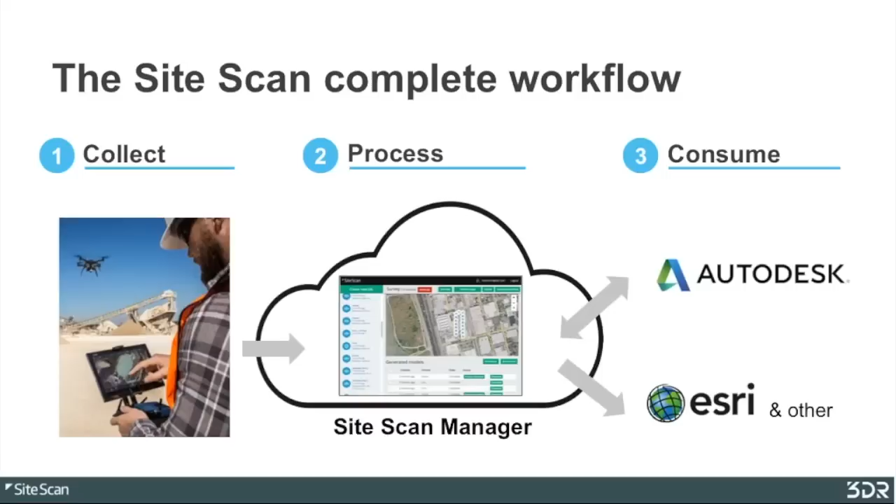So to conduct this, we used Site Scan with the R10C. The advantages we liked about Site Scan since we started working with it early on was the ease of use for collecting this information. It's a very simple product to use to design your flights on the fly and modify them as need be. The ability to upload that to the 3DR cloud for processing, and then finally being able to push that information into tools that we use commonly like Autodesk and Esri, or Esri's Drone2Map.

So we started using Site Scan with R10C back in March of this year. However, we've been working with unmanned systems for some time prior to that. We have had a 333 exemption since fairly early on. We were somewhere around 300 on the 333 exemption list. And our focus has always been on trying to make the same kind of products that our clients have always wanted. The end product doesn't change, just the means of collecting that information.

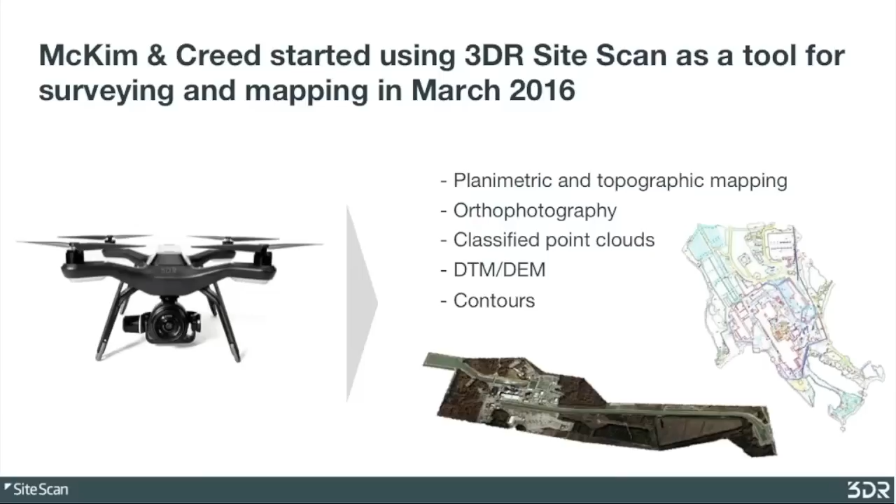So the clients are still going to want the same planimetric information that they've always wanted, held to the same specifications. Same for the orthophotography, the point clouds that are created through the dense image matching processes, and the surface models, the DTMs, DEMs, breaklines, and contours. So the products don't change. What changes is the way you collect the information. So you're still held to the same kind of standards. So that's always been our focus, and we felt that the best way to do that is to focus on smaller systems with big sensors to help us achieve the kind of accuracies that our clients expect.

So as I mentioned, there's 3 different project areas that we collected on this day. The first one being Wrightsville Beach. This is project 1. And in fact, in this image right here, you can see several of the areas that we collected. So we collected from this pier right here down to the end of the island, as well as the inlet jetty for Masonboro Island, which is to the south of that.

So the goal for the Wrightsville Beach project was to collect volumetric information for beach renourishment, and we wanted to assess the before and after condition of the beach for any type of storm event. We did this during Hurricane Awareness Week, which is kind of salient right now because we have a hurricane coming towards the United States. And it's important to be able to know the condition that the beach is in prior to a storm event like this so that reconstruction can take place correctly and you can assess the amount of damage that was done. So the idea is to collect topographical information about the beach before and after a storm event.

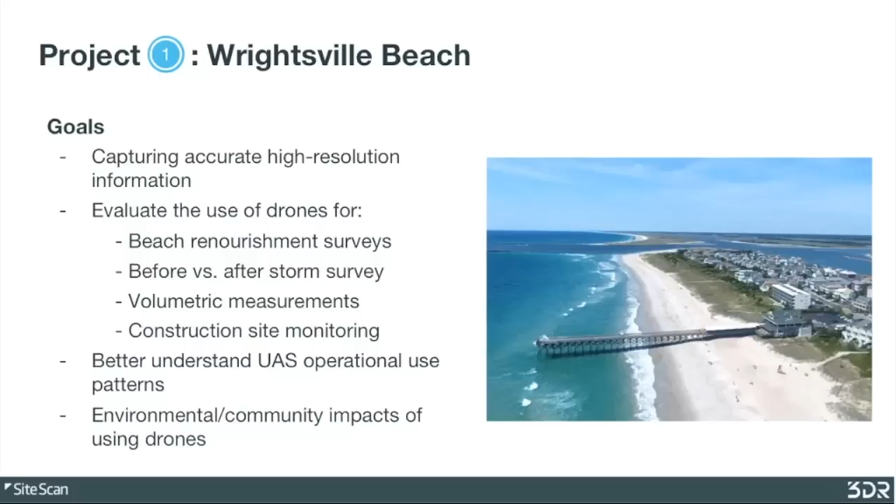So to do this, we laid down traditional ground control. We needed to be able to georeference this information as best we can and to assess it compared to traditional methods. So we laid down 14 control targets. We also collected 22 blind check shots. So it's 2 different types of survey, and this is pretty common with most types of remote sensing projects. You have your targets, your control, which is used to actually reference the information to the real world, and then you have your blind check shots, which are used to assess the quality of fit of the data.

So we conducted several flights with a few different systems. We did 2 flights with the Site Scan system with R10C up to the pier, and then another flight down on the south side. We also flew the Site Scan with the GoPro system at 400 feet AGL as well, because the camera system is a little different. The ground sampling distance obviously is about twice that of the R10C system. And then finally, we also flew it with a Phantom 4 at 200 feet. We flew it a little lower because we wanted to get a similar ground sampling distance to that of the R10C system. In order to do that, we had to fly it at half the altitude.

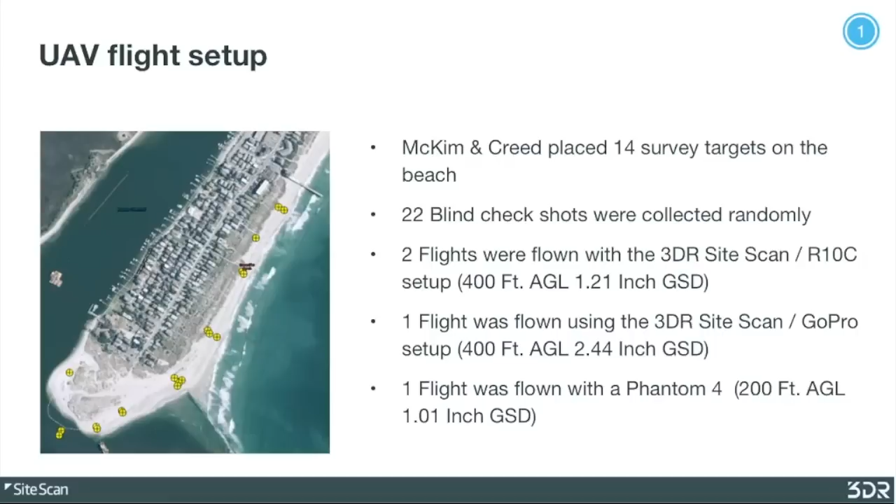So we processed that data. It took about 4.5 hours to produce our orthos, our digital surface models, our point clouds, and our 3D mesh. And then once measured, we were able to calculate our RMSE, which is our root mean square error, and we'll talk about that here in the next slide.

So how do we measure accuracy? So again, the idea is to treat this data similarly to how we would data from other systems. So using these processes, we create what some people call dense image matching, some people call it FODAR, structure from motion. It's all the same thing. It's point clouds created from the imagery. And so we wanted to assess the quality of that. And to do so, we treat that the same way we would a LiDAR point cloud.

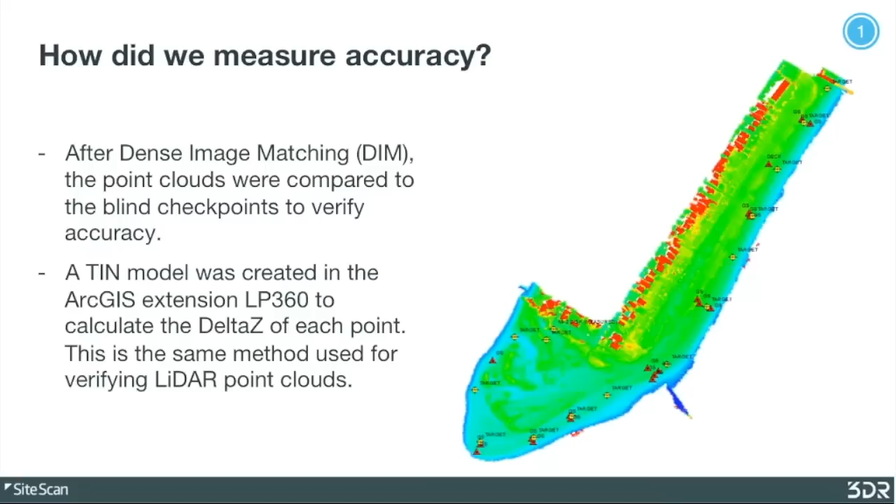So we bring that point cloud into software that would be used to evaluate that. And in this case, we used LP360, which is an extension of ArcGIS, to verify the quality of the TIN. And to do that, we bring in our blind checkpoints and we check the delta between the Z-value of those points versus the Z-value of the TIN directly above that point cloud. This is a very common process for assessing any type of point cloud information.

So the results, you can see we tested all 3 of those systems that we flew. And if you look at the very bottom, this is the vertical error tested against the point cloud. There's several different things we're looking at down here. You can see our error mean, our error range, our RMSE, and our 95th percentile, which is held to a higher standard.

So you can see first the Phantom 4, we had a pretty high RMSE. So it's 0.527 feet, which is pretty high for what we were looking for and the tools we were comparing against. And you can look at the error range on that. So some of those blind checkpoints were hitting anywhere between negative 0.8 feet and positive 1.4 feet. And then if you look at the NSSDA contour interval for that, you can see that the best we could conceivably do with this data is 2-foot contours.

Looking at the GoPro system, you can see that the RMSE is a lot lower. We've got 0.3. Again, a little higher than what we were looking for this type of project, but keep in mind that the ground sampling distance for that was twice that of the R10C system. And the outliers are much lower than that of the Phantom 4 that was flown. And then finally, the R10C system. You can see the RMSE is in the 0.13 range. Our error range is much lower. And the minimum contour interval is down to 0.4.

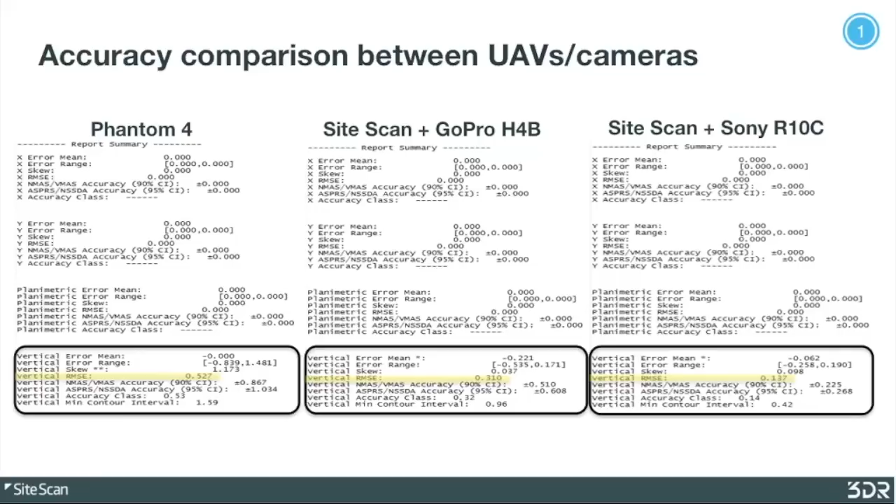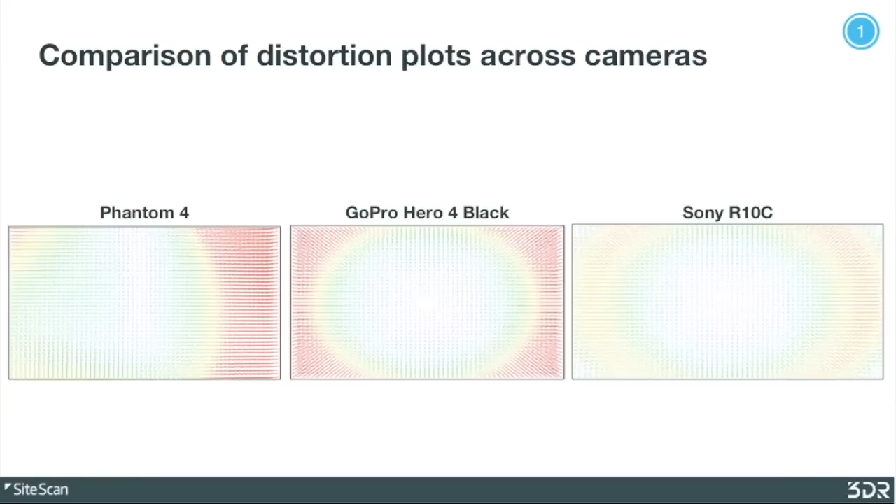So the next thing we were able to do, fortunately, when we flew Wrightsville Beach, at the same time, the Charleston Army Corps District was planning on doing their terrestrial LiDAR scans of the beach. This was something that they were planning on doing anyway as a pre-storm analysis of the area. So we were very lucky to be able to coordinate with them on this day to be able to collect this information at the same time.

They were able to use the same control points that we were using and the same blind checkpoints so we could compare the two data sets. And if you look, you can see that their RMSE was very, very similar to that from R10C. So they're right around 13 hundredths. If you look at the vertical error mean, their vertical error mean was also very similar to ours. However, it happened to be in the opposite direction of the error in the R10C system. So you got kind of the worst case scenario where one data set's a little bit above the control and one data set's a little bit below.

So to take that a little bit further, what we wanted to do was do a surface comparison of the two. So we created a bare earth surface of both point clouds. So we were just looking at the bare earth. And again, we wanted to do a delta of the two. So what you're looking at right here are the two overlapping data sets. Areas in green are where there was coincident data and the two data sets were within 3/10 of each other. And areas in purple are where they're either greater than 3/10 or there was not overlapping data.

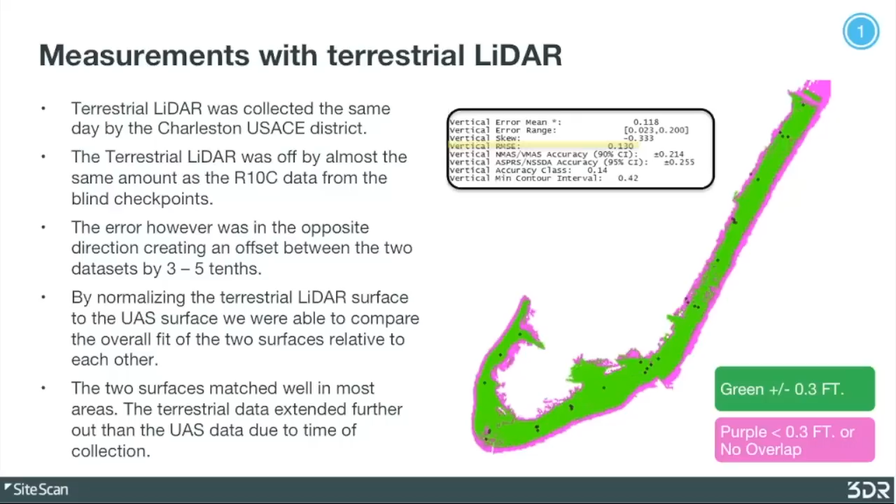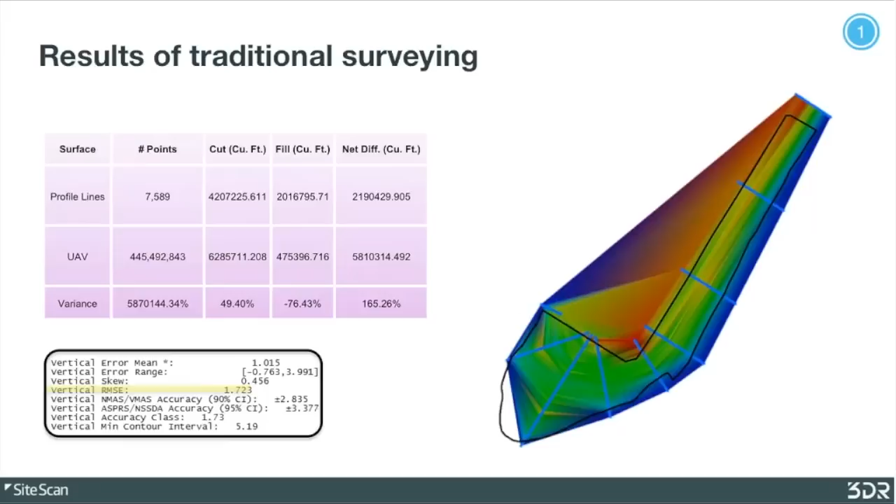So we ran our blind control points on that, which again is not a very fair assessment, but you can see our RMSE is very, very high. The minimum contour interval for this is 5 feet. And then we did some volume analysis of the black area just to determine the differences between it. And as you can see, it's quite significant between the unmanned system and the surface created from these profile lines. There's a huge amount of variance.

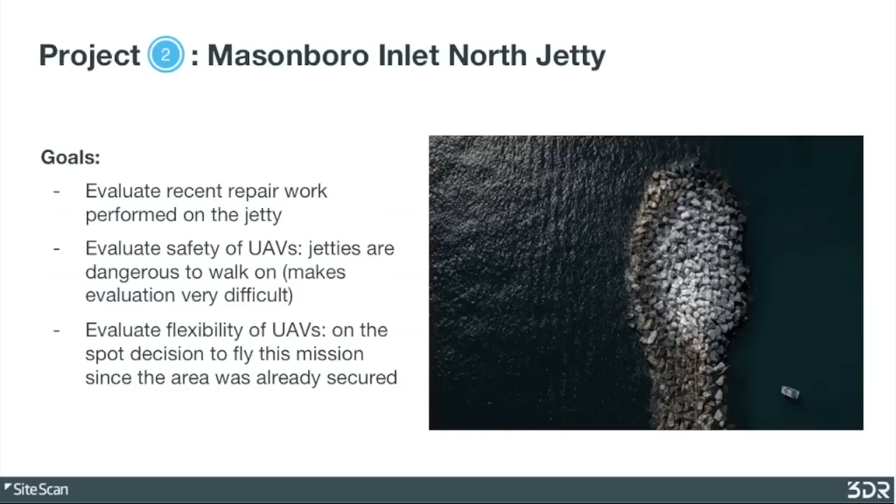So the next site was the North Masonboro Inlet jetty. This was the barrier island just south of Wrightsville Beach, and it's the northernmost inlet jetty. So when we originally set this project, although this area was controlled, we weren't necessarily planning on flying it. However, the Army Corps of Engineers that was there watching our flights as well was curious if we could fly this jetty. And the reason was because recently they had some work done on it, and they were just curious if they could look at that work.

And you can kind of see it in this GIF that's going by. There's some rocks that are pink, and then there's some that are gray. Those pink rocks were recently placed there on that site to kind of repair the jetty. So we went ahead and we flew this. And that's one of the nice things about unmanned systems: we have that flexibility to go ahead and plan this on the fly to collect this area.

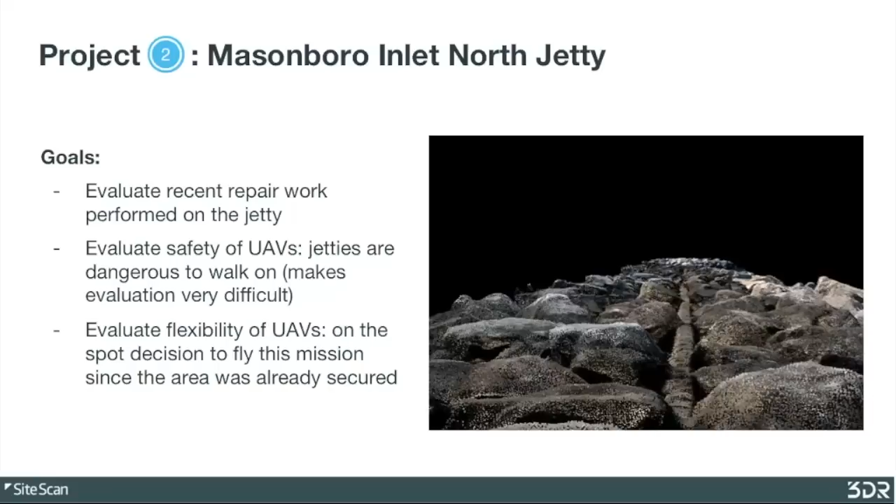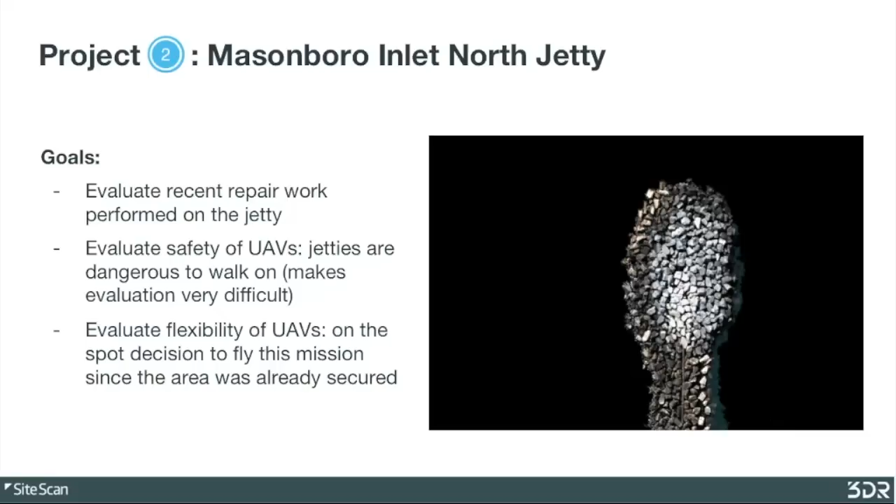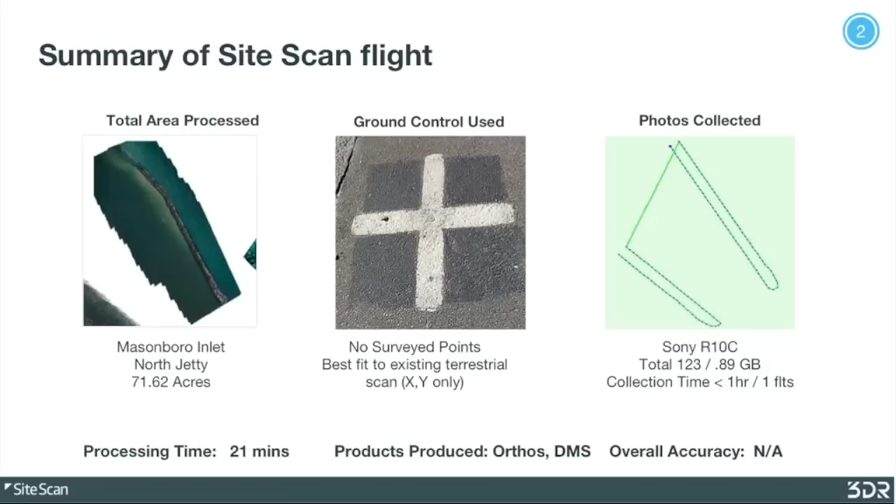Unfortunately, we did not have any ground control over this area because it was kind of an unplanned flight, and it's a fairly difficult area to collect some targets because it's just a very unsafe place to be walking on. So we covered about 71 acres for that. It took us about 21 minutes total time to process that. Again, we did not have any ground control. And we had 123 images that covered this area, similar ground sampling distance to what we collected before.

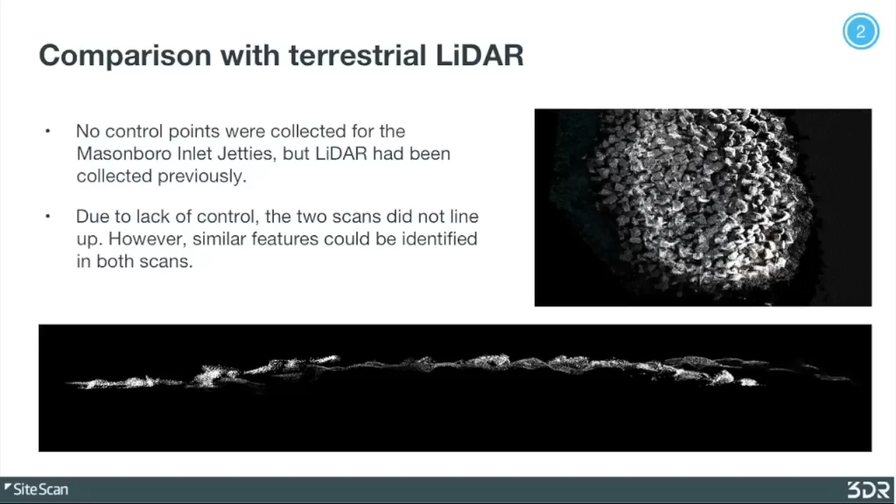One thing, however, that was pretty interesting about this particular project were the orthos. So we gave the orthos to the Army Corps of Engineers, and they were able to use them, even though they weren't spatially perfect, to assess the work from the subcontractor who had placed the new rocks on the jetty. And they realized that most of the work had been done the way it was contracted, but they did find areas where things were not 100% how they were supposed to be, and they were able to use that information to go back to the subcontractor and have them make the corrections necessary. And there wouldn't have been a practical way to do that otherwise. So it was kind of an unintended benefit of that particular project.

So again, kind of a cost comparison for this second site.

We didn't do a traditional survey cost analysis. Although it can be done, it is dangerous in a difficult area to collect. The terrestrial LiDAR system that they had collected with, we did a comparison of that. It was about 30% cheaper. And again, the aerial LiDAR, because the site is so small, was about 75% cheaper to do with the unmanned system.

So Kevin, I'll pass it back to you. Perfect. Great. Thank you, Christian.

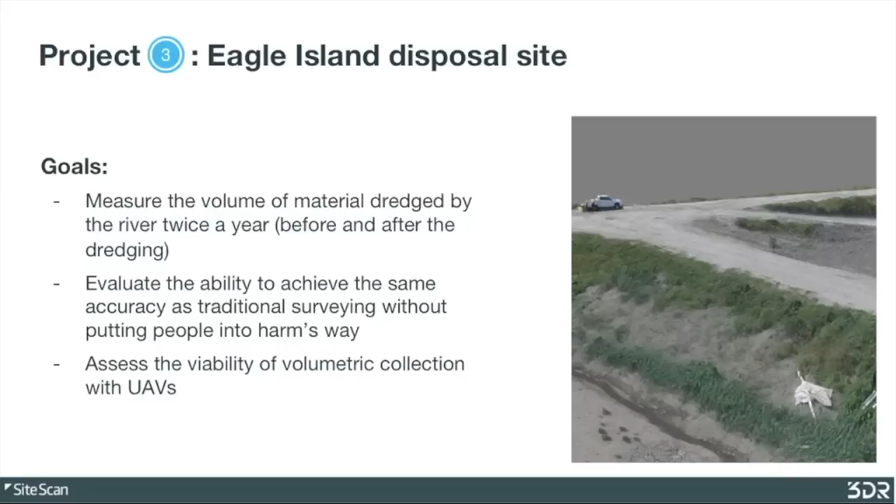In fact, when they do traditional survey, the way that we were told that they go about it is, when they're doing the profile lines across the pond itself, they take 4x8 sheets of plywood and they place them inside there to increase their footprint on the area, and they take their profile shots, and then they take another piece of plywood and they place it in front of it, and they hop onto that one, and they continue across the pond that way, which is not very safe. It's safer than just being on the pond itself, but you're still putting people in harm's way for some potential accidents.

So when we went to the site, what we did is we collected part of cell 1 and cell 2, and we did not want to put anyone inside of these areas where they were dangerous. So we collected ground control. We put 7 survey points around the area on the dikes themselves so that we didn't have to go inside of any of these containment areas.

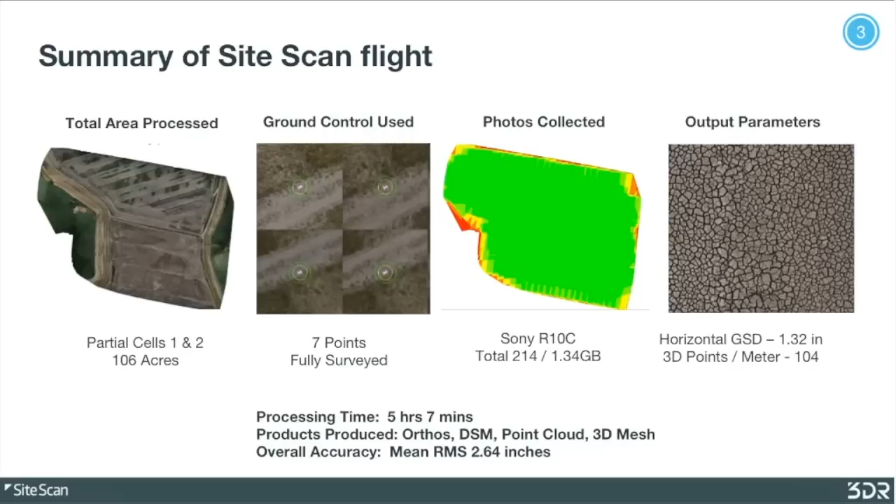And we collected 2 flights, a few more images than before. We collected 214 images over this area. It took about 5 hours to process all that data. If we were to collect the entire cell 1 or cell 2, it would have taken about 4 hours to collect the whole area. But for this purpose, we only collected a portion of it to compare.

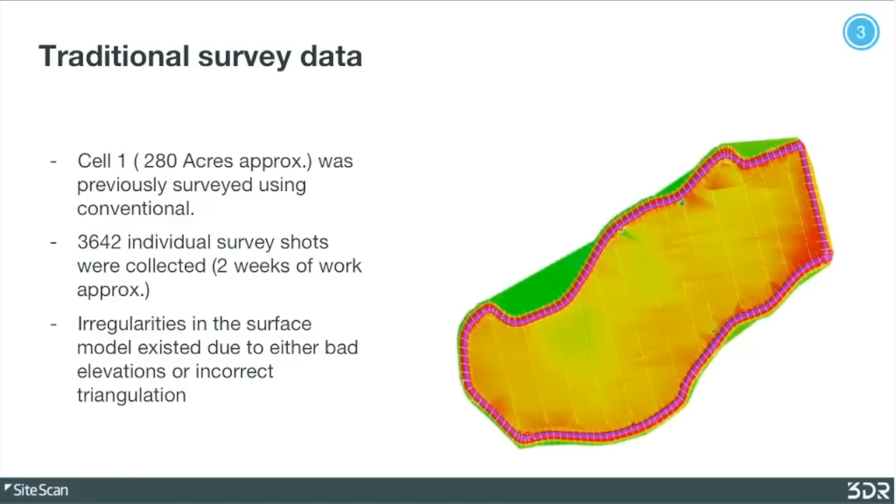So there's about 280 acres in this particular site. And you can see there's some irregularities in the surface. If we zoom in on some of those areas, we can see them in a little more detail.

The difficulty when you're doing traditional survey is that you need to be able to interpret what's going on in the field well, where all those break lines are, so you're efficiently collecting that information to properly represent that surface. And there's some anomalies in this particular data set that we received that are going to show up in the surface model and affect your volume calculations.

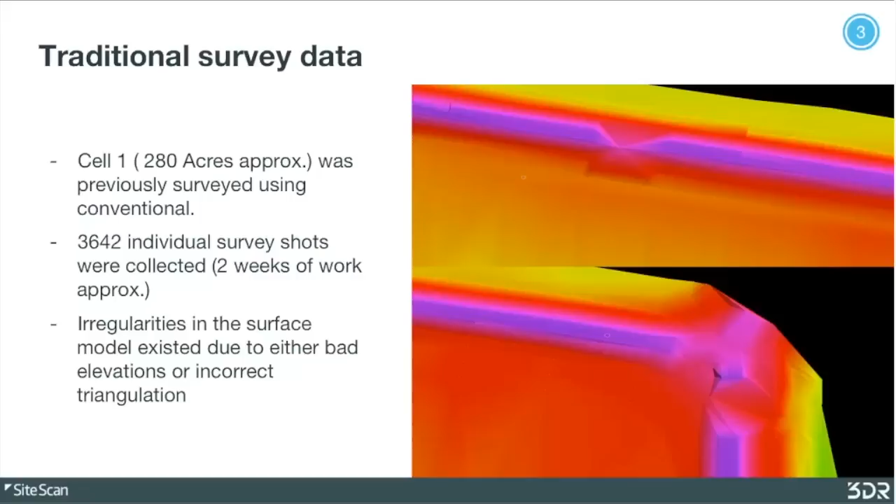Our point density was about 104 points per square meter. Again, it's a little unfair, but if you did the point average for the survey for this site, it's about 0.07 points per square meter. So as we go in, we look in those areas that we were looking at earlier. These are the same areas, and this is the surface there in the same areas. And obviously, there's a lot more detail in these locations.

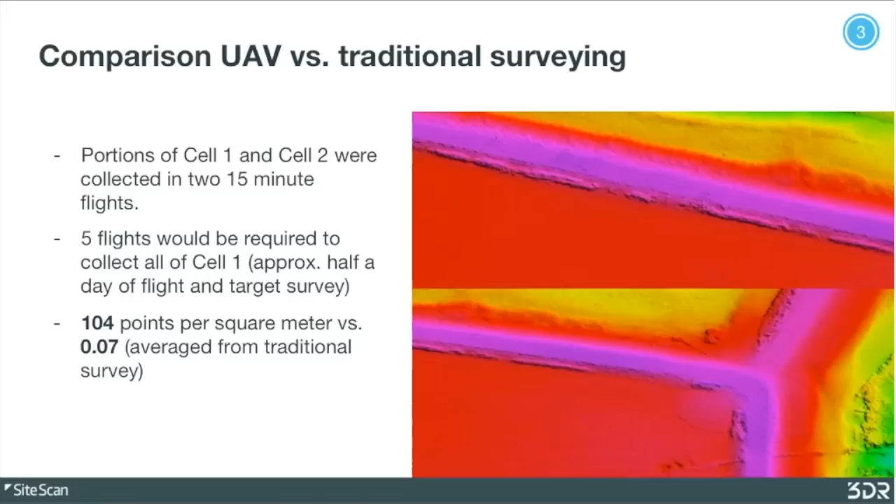So the next thing that we want to do is take those survey shots that were collected a little bit earlier in the year and compare them to the surface that we created. Now again, remember we only held 7 control points. We didn't collect any blind check shots for the site because we knew that we had this existing survey to compare to. So we're using LP360 here again, which is the ArcGIS extension, and we're looking at the surface model created from the SiteScan system as well as all the survey shots.

So we have a plan and profile view again. And if you look at the profile view at the bottom, where you can see where the survey was collected, by and large it was collected really well. All the break lines are collected right where the surface changes on this particular profile line that we have a segment of.

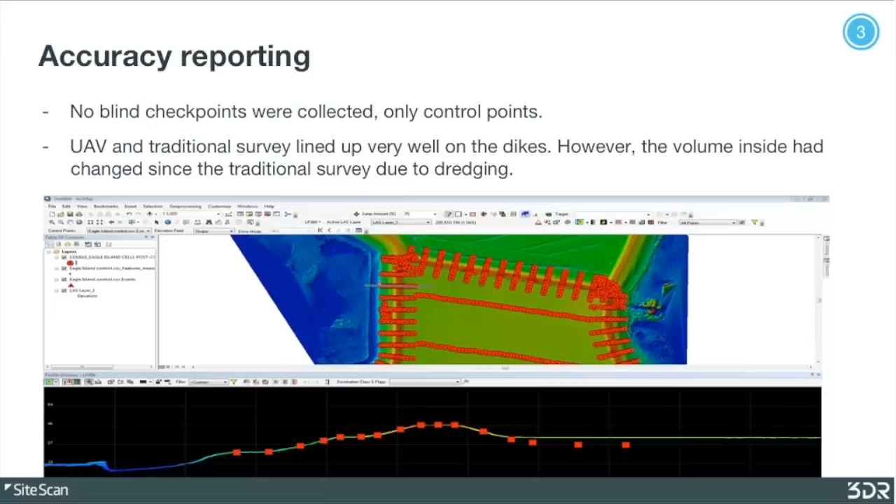You can see inside the pond on the right-hand side of that profile line where there's a difference between the two. That's because these two areas were collected at different times of the year. The traditional survey was collected prior to dredging, and our flight was done after the dredging had occurred for that year. So that's why you're seeing differences on the inside of the pond. But when you look at the dike itself, you can see that the survey and the SiteScan data line up quite well.

So we want to take it a little step further in comparing these two. Similar to what we did with the terrestrial data, we did the same thing with the conventional survey and the SiteScan data. We took the two surfaces created from each of them and subtracted them from each other to create a delta, a normalized surface of what is left over. So what you're looking at right there is a surface model of just the difference between those two. And those areas that are green are between 1/10 of a foot and 2/100 of a foot.

Inside the pond, like we talked about, it's much higher because material has filled that pond since then. And the other thing that you see is some of the irregularities from that particular survey where the two data sets aren't lining up. That's not necessarily an error in the SiteScan data. It has more to do with the fact that the surface created from the survey had some irregularities in it. But all in all, the two surfaces in the areas where the data hadn't changed lined up quite well.

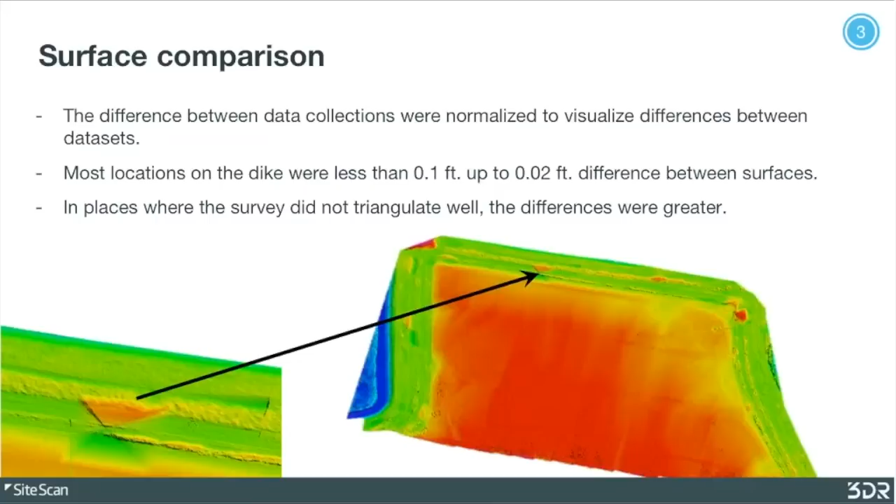So a business analysis of this site, similar to what we did with the other two sites. Traditional survey in this particular case is going to be a lot more expensive. It takes about 2 weeks to collect this site, and because of the danger involved and what's required to collect data across that pond, it's a lot more expensive. The UAS was going to be about 80% more cost effective.

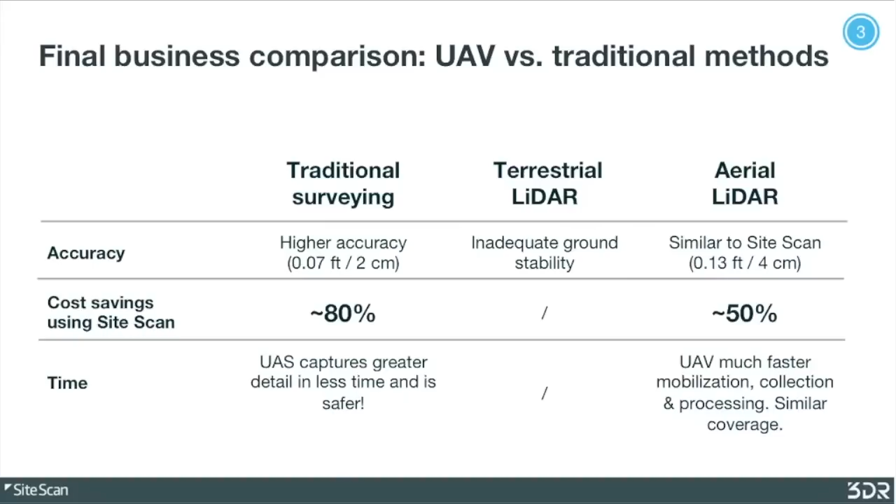Similar to the jetty, we didn't price the terrestrial data for this particular one because of the instability of the ground. And finally, the site was a little larger, but it's the same theme with the aerial LiDAR. It has to do with the deployment and the size of the site. The UAS would be about 50% cheaper than aerial LiDAR for this particular site.

So those were the sites that we were able to kind of assess this with. And we felt like we kind of achieved the goals we were looking for. We felt really blessed that we were able to compare all these different traditional methods of data collection to the unmanned system. And I know it's kind of a cliche, but we felt like we were able to get it cheaper, faster, and similar accuracy.

And a fourth circle you could probably add in there is we could collect a lot of this stuff safer for some of these sites, which is a huge advantage. It takes less people for these particular sites to do this. Again, we increase safety, and we were able to create these products quite rapidly as well. So we were pretty excited about that.

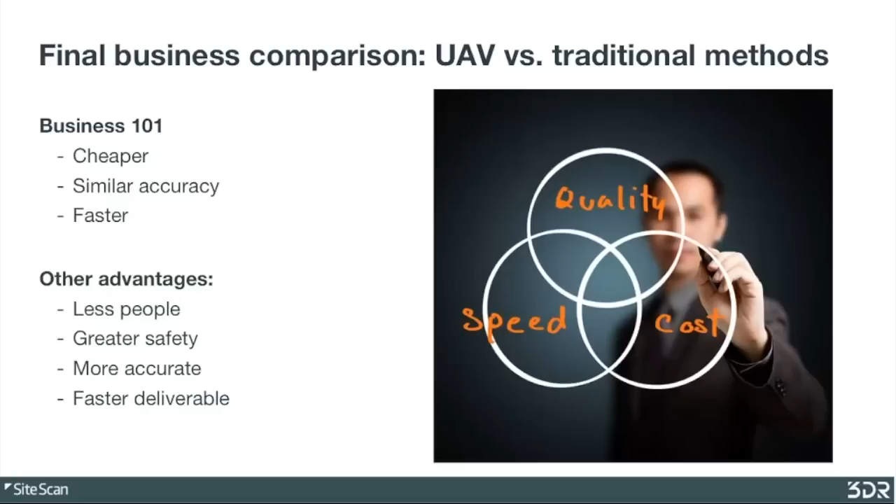So as part of this ongoing analysis of unmanned systems and how they work for a geomatic firm like us, kind of the next steps for us, and I'm sure many firms similar to us, is Part 107 is changing things quite a bit. It's simplifying things. We have known rules. We understand how we need to operate in the national airspace and how to do everything under the regulatory system that now exists.

We feel comfortable with the technology when it's done properly, and now the process is just to increase the amount of systems so that we can have them in more of our areas that we operate to offer more cost-effective, rapid deployment of some of these systems. So eventually we hope to have an unmanned system in all of our trucks.